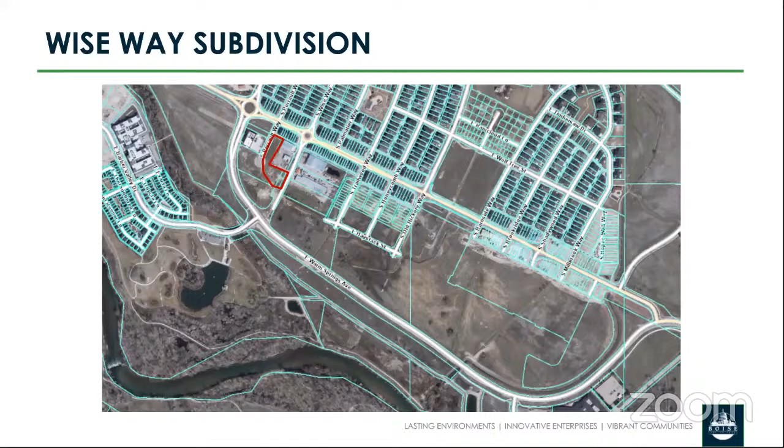Madam Chair, Commissioners, the next item on tonight's agenda is a request for a preliminary and final plat on 1.51 acres in an SP-01 zone. The residential subdivision is comprised of 4 buildable lots for future multifamily residential developments and live-work units. The proposed lots comply with the dimensional standards of the SP-01 zone and the Harris Ranch specific plan.

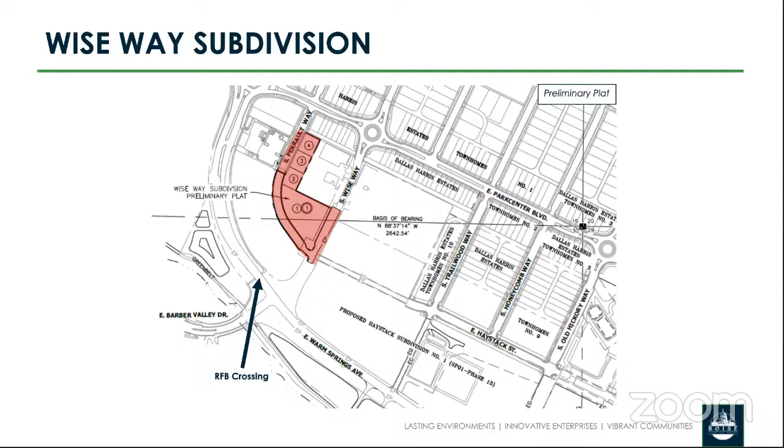The Harris Ranch specific plan designates the site as mixed-use commercial and medium high-density residential. The proposed street layout matches the circulation plan for the area. All of the buildings will be required to comply with the dimensional standards of the SP-01 zone and will require design review approval prior to receiving building permits.

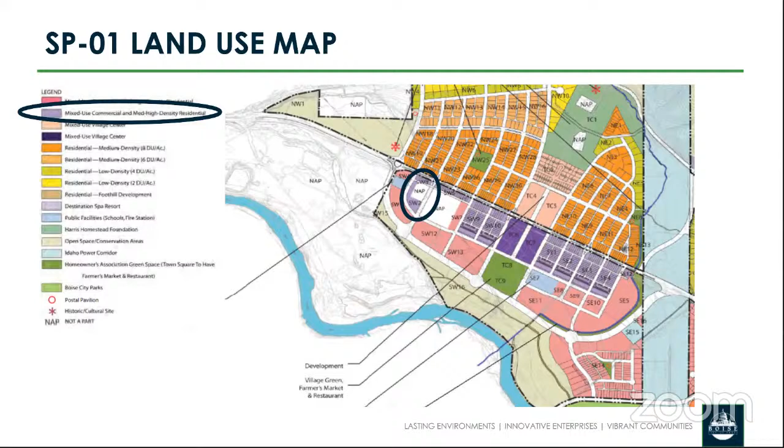The lot layout will comply with these block prototypes, which show several configuration possibilities, including attached townhomes, condominiums, and apartments near the sidewalk, creating a vibrant streetscape.

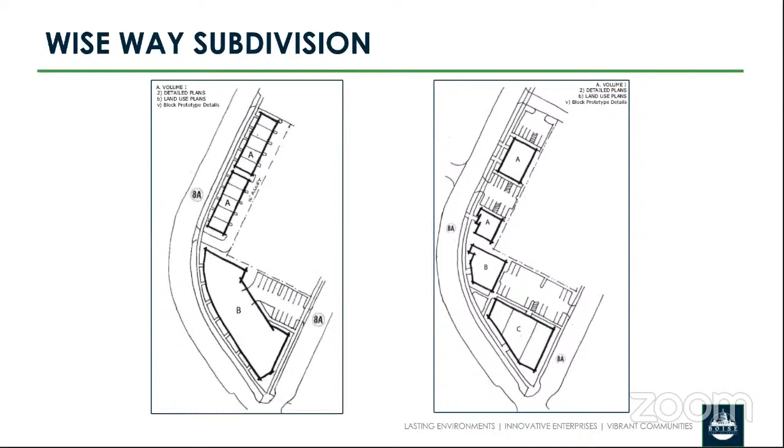PERRAULT Way is currently partially improved with 2 lanes, curb, gutter, and no sidewalk. The applicant proposes to extend PERRAULT Way to Wise Way and complete the road as a 39-foot wide street section with on-street parking, curb, gutter, planter strip, and detached concrete sidewalk abutting the site.

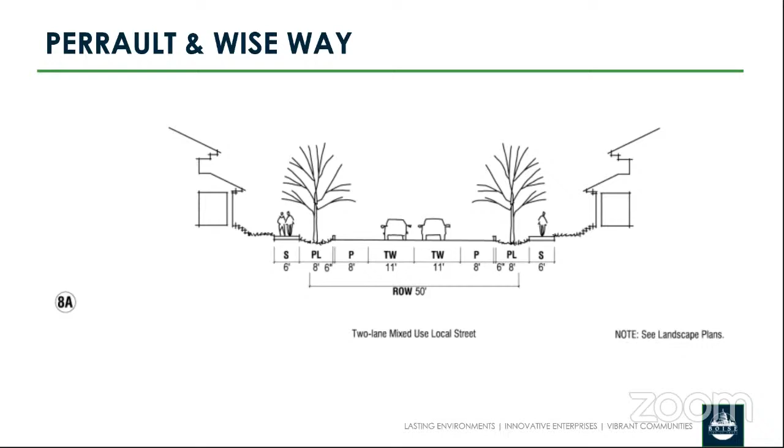Wise Way abutting the site will be improved as half of a 39-foot wide street section with a travel lane, on-street parking, curb, gutter, planter strip, and detached sidewalk. This is in compliance with the circulation plan of the Harris Ranch specific plan.

A future roundabout at Wise Way's intersection with Warm Springs Ave will be constructed once traffic counts warrant construction. Eventually, and if warranted, the specific plan has Warm Springs Ave planned as a 4-lane arterial roadway with 2-lane wide roundabouts at each intersection. However, it was determined that no improvements to Warm Springs Ave or its intersections would be needed at this time. As noted in the previous plat, the city is starting discussions with ACHD about the process in which to keep Warm Springs at 2 lanes.

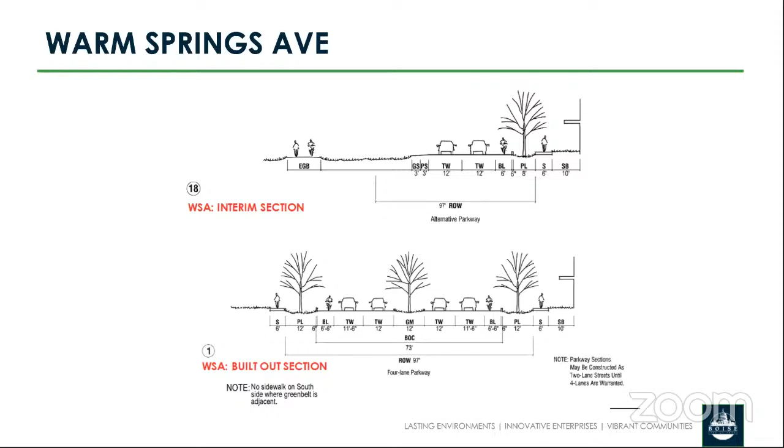Currently, the closest north-south pedestrian connection across Warm Springs is the rapid flashing beacon at the entrance to Marianne Williams Park, 341 feet to the south of the site. Comments from BB&A are included in late correspondence, and they are here tonight. In summary, BB&A supports the plat, but believes Wise Way should include bike lanes.

The Harris Ranch specific plan is an approved plan that provides both the neighborhood and developer assurances of what is planned and approved to be built in the area. The plan was recently amended in 2019, and while the neighbors' concerns are valid, they aren't specific to this subdivision application, but rather the entire Harris Ranch area.

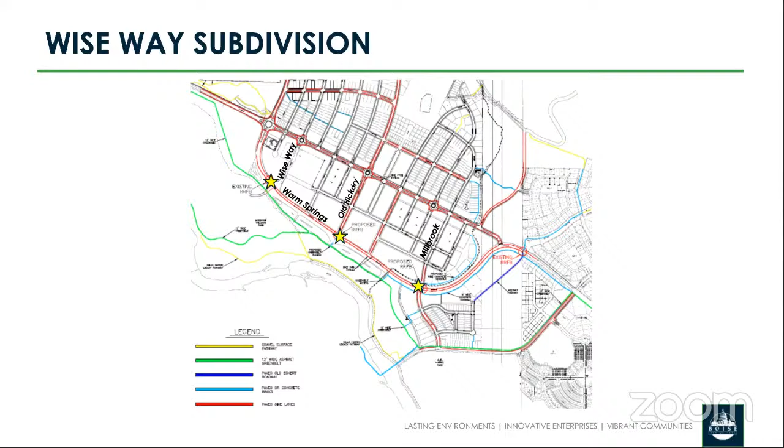These concerns would have been best addressed under the context of last year's specific plan amendment, and at this time, only a prelim and final plat is before the Planning and Zoning Commission in order to create the proposed lots and continue to extend right-of-way. Changes can still occur within the local roadways after build-out to accommodate pedestrians and bicycles. This should not delay the platting process.

As conditioned, the planning team recommends approval of the application with conditions. Thank you. Okay, thanks, Nicolette. We'll go ahead and hear from the applicant now.

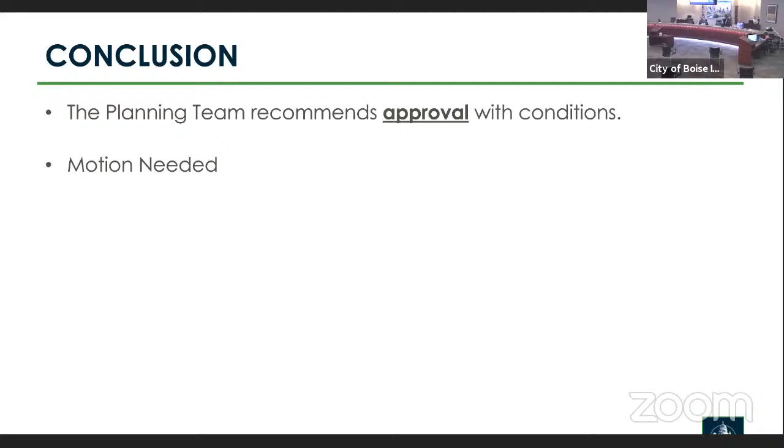Hi, everyone. Can you hear me? We can. Okay. Hethe Clark, 251 East Front Street with the law firm of Clark Wardle representing the applicant. I'll note that Doug Fowler and Dave Powell are also online, and if there are questions that either of them are better at answering, I'll defer to them.

I have prepared a slide deck, but I think in the interest of time, what I would like to just emphasize is a couple of things. First of all, as Nicolette mentioned, this does comply with SP01. It complies with all of the applicable block prototypes. And because it's squarely within the boundaries of SP01, this is a fairly straightforward matter.

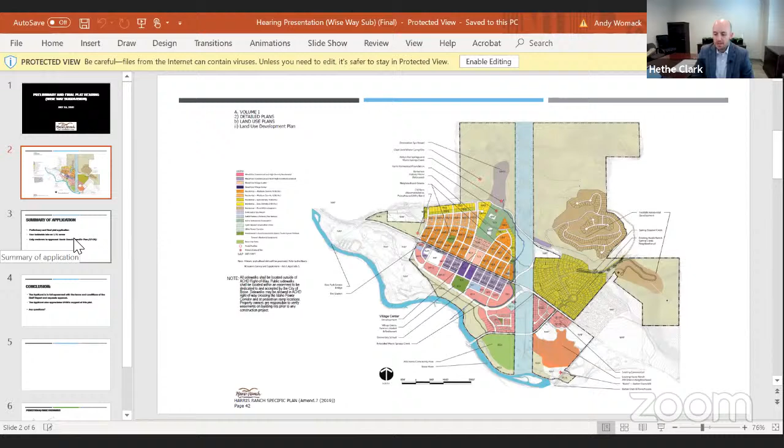We have appreciated the opportunity to work with and continue discussions with Barber Valley Neighborhood Association over the past several months, and we anticipate that continuing. But in the meantime, we are in agreement with the terms and conditions of the staff report and would ask for your approval. In the meantime, happy to answer any questions.

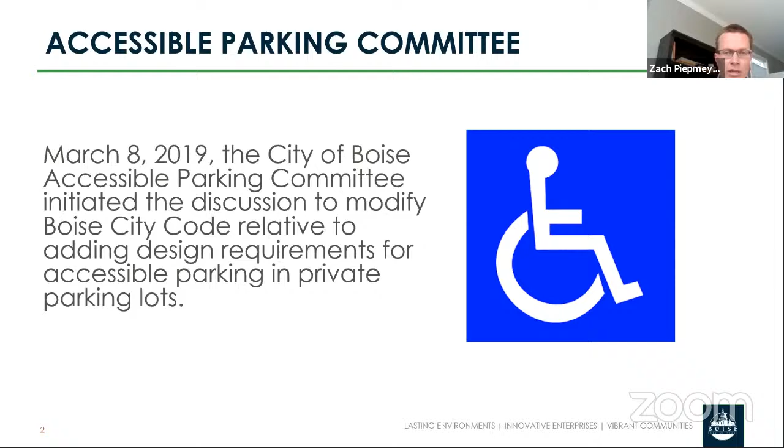Thank you, Mr. Chair and Commissioners. This item is in regards to proposed zoning code changes for accessible parking found under Boise City Code Chapter 11-07-03.5. Back in March of 2019, the city's Accessible Parking Committee initiated the discussion to modify city code relative to design requirements for accessible parking on private lots. From that discussion, the committee made three specific recommendations to the city of Boise, which are listed here.

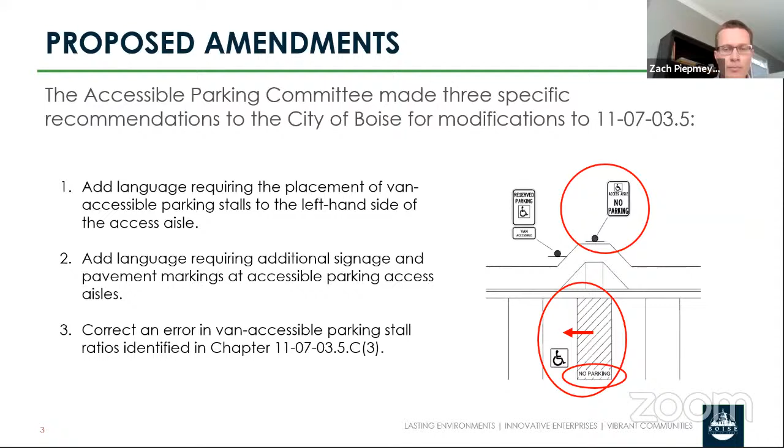The first is to add language requiring that the placement of van accessible parking stalls be to the left-hand side of the access aisle. Second is to place both signage at the head of the access aisle and pavement markings within the access aisle to indicate that it is in fact not a parking stall and therefore parking is prohibited. The third item is to correct an error in the ratio for van accessible to standard accessible parking stalls under subsection C3. Specifically, that third item references text where the current ratio is listed as 1 to 8 accessible spaces. However, the 2010 ADA standards for accessible design, and our code under 11-07-0.5.A, correctly identify the ratio as 1 to 6.

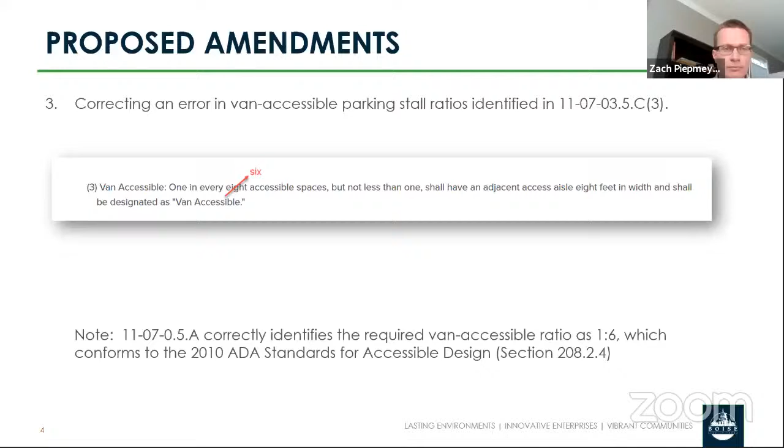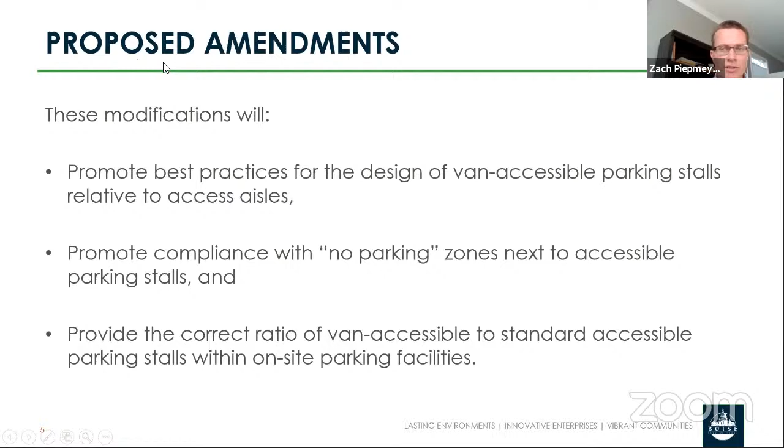These three modifications will promote best practices for the design of van accessible parking relative to the access aisle. It will promote compliance with no parking zones at accessible parking stalls, and it will provide for the correct ratio of van accessible to standard accessible stalls within on-site parking facilities. By providing the appropriate number of van accessible spaces, improving the design criteria for those stalls, and providing clear signage and pavement markings, the city of Boise will promote adequate facilities for those living with disabilities. These modifications will allow all individuals to have safe and efficient access to parking and buildings, making a significant improvement in comfort and safety for both residents and visitors.

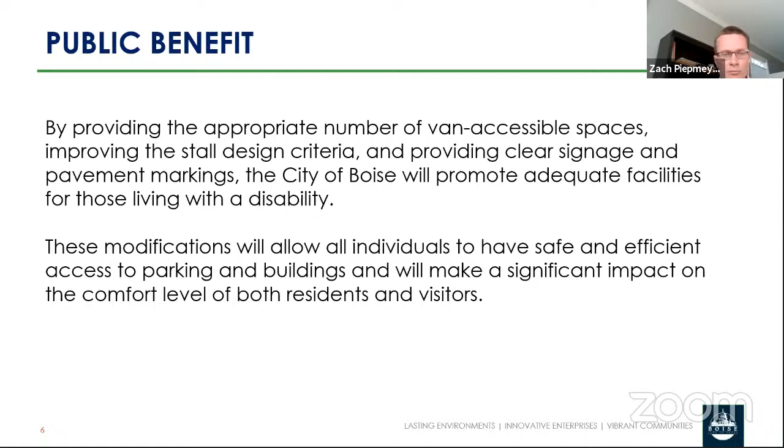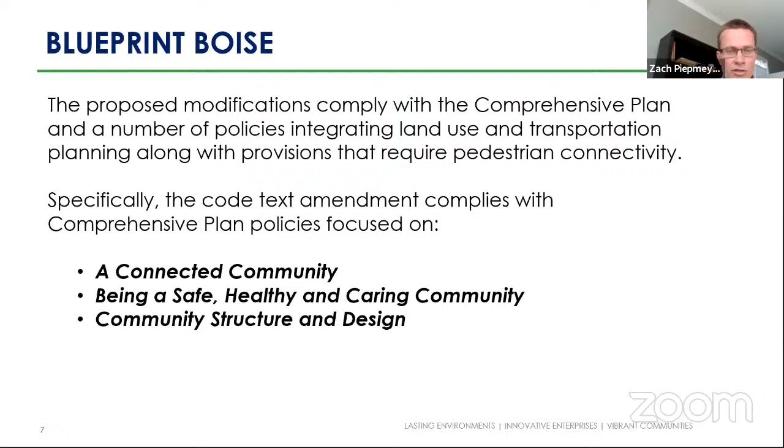In terms of Blueprint Boise, the proposed modifications comply with a number of policies integrating transportation and land use, specifically those reflected in a connected community, a safe and healthy and caring community, and community structure and design. With that, Planning and Development Services recommends that the Boise City Planning and Zoning Commission submit a recommendation of approval to the Boise City Council regarding the modifications to Chapter 11-07.03.5 noted within the staff report. I'll stand for any questions.

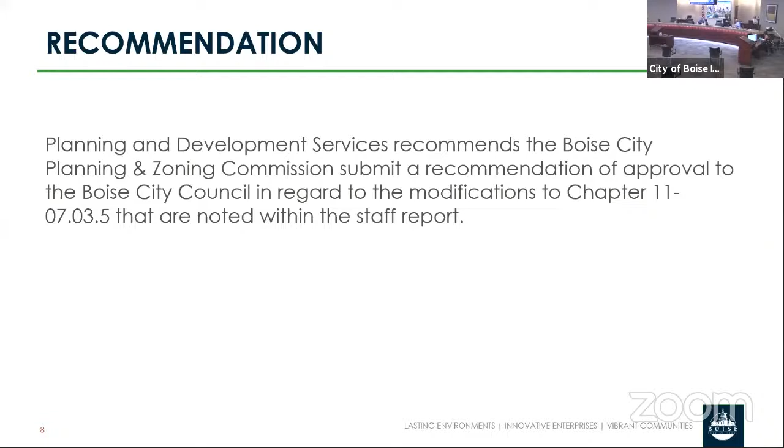Okay, thank you for that. Since the applicant is the city and it's a citywide code change, there's no neighborhood association, so I think we'll move right along into questions from the commission for the applicant.

Mr. Chair? Commissioner Bratnober. Yes, I have just one question. Am I correct in assuming that all current parking lots are grandfathered in under the old rules subsequent to the adoption of this?

Mr. Chair and Commissioners, I might defer to the current planning staff that's on hand, but I believe that is correct. For the record, Andrea Tuning, Comprehensive Planner for Planning and Development Services. That would be correct. Any existing parking lot would be grandfathered in, unless they were to ever change the use or redefine the parking lot. At that time, they would be required to come up to the current code, which would require the accessible parking stall design, signage, and pavement marking. Thank you very much.

Okay, any other questions for staff? Mr. Chair? Commissioner Blanchard? Can someone on city staff speak to the public contribution on this issue? What groups did we work with, or is this just a technical correction in your estimation? Mr. Chair and Commissioners, the recommendation actually originated from the city's citizen accessible parking committee, made up of seven members of the public who are familiar with this topic, and that is where the idea was generated. There's been no specific public outreach for this item or the proposed changes therein.

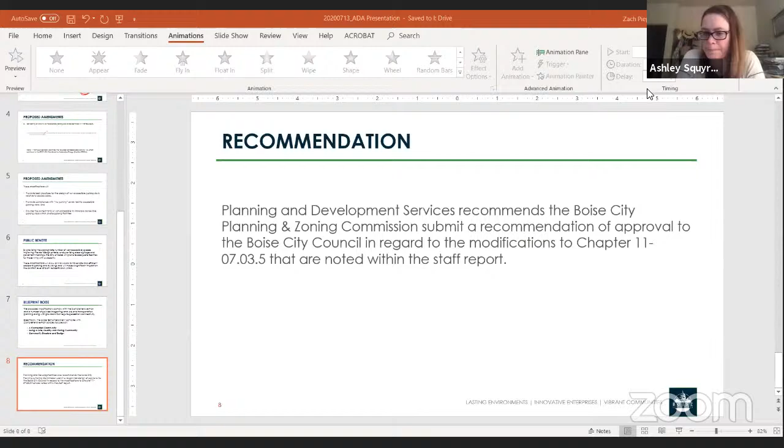Do I have a motion? Commissioner Bratnober? I move that we approve ZOA 19-4 based on the recommendations of the staff report. Second. A motion from Commissioner Bratnober, and I think a second from Commissioner Squires.

Any discussion? Okay, well, I'll just chime in real quick. I think that it's certainly a positive move to make this change to the code, make this recommendation to City Council. So we'll just kind of keep it short and sweet and leave it at that. Unless there's any other discussion, and if I'm missing someone, but I don't think I am, we'll go ahead and just call the vote.

Schaefer, Aye. Squires, Aye. Blanchard, Aye. Moore, Aye. Gillespie, Aye. Finfrock, Aye. Bratnober, Aye. All in favor, motion carries. Okay, thanks everybody.

And now we'll move on. I believe our next item is number 4. That is CFH 20-35 and SUB 20-17 at 3773 North Cartwright Road. This is a hillside grading permit and preliminary plat for, I believe, 4 buildable lots on 9.28 acres. And Mr. Moser is here this evening for staff.

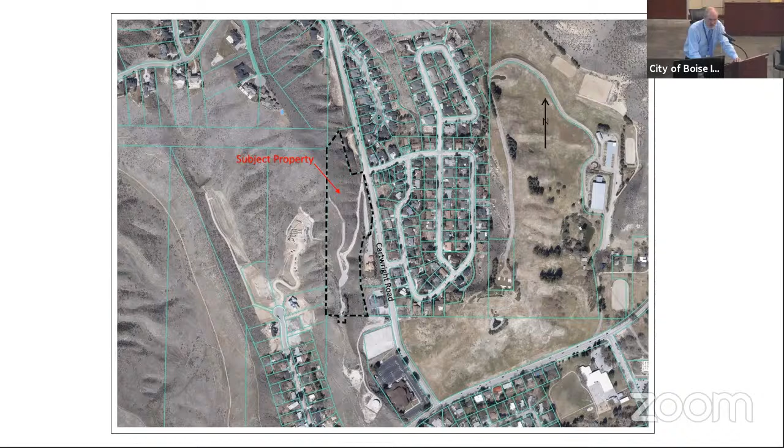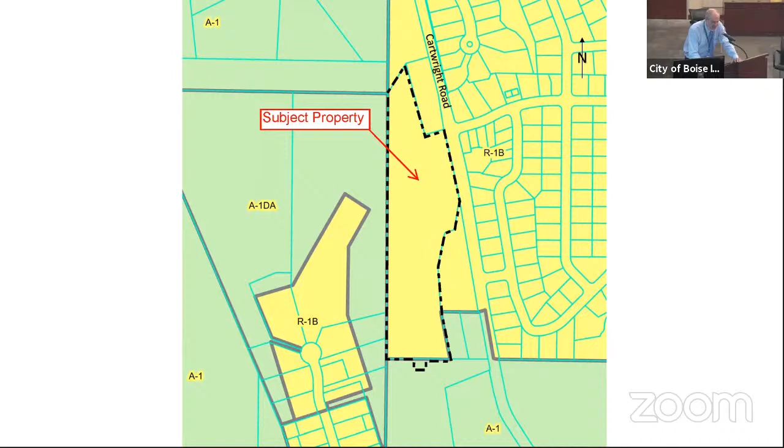This slide shows the current zoning of the site, which is R1B, single-family residential, with a small section of the property to the south zoned A1. Therefore, since the current zoning is already R1, single-family residential, no rezone is requested with this, and it's just a subdivision and a Category 3 hillside review application before the commission. I would note that the density of this project is actually very low. It's 4 lots on over 9 acres of land, so it's 0.4 units per acre at the proposed density.

The subject property, well, before I start, just a reference, the north arrow here is actually to the side of the page. It's just easier to configure the odd configuration of this lot on the slide. So the north arrow is not to the north or to the top of the page.

The subject property was initially platted as Lot 3 of the Lononi Hills subdivision with the intent to be developed as a single-family house. The grading of Lot 3, which included the service drive and the building pad, was completed back in 2002. The grading created a relatively flat area on the top of the ridge. The applicant intends to grade this already existing flat area into 4 building pads, each on its own lot, and the lots will range in size from 1.2 to over 4 acres in size.

This is the proposed lot layout for the subdivision on the preliminary plat. The grading plan shows the 4 buildable pads and the service drive, which is existing. Since the grading is generally restricted to the previous graded area, the grading proposed is limited to the essential grading only, and the cut and fill is balanced throughout the site with the proposed project. The project grading was reviewed by the public works engineer, who stated that if all the conditions are met, the project is in compliance with the Hillside Development Code.

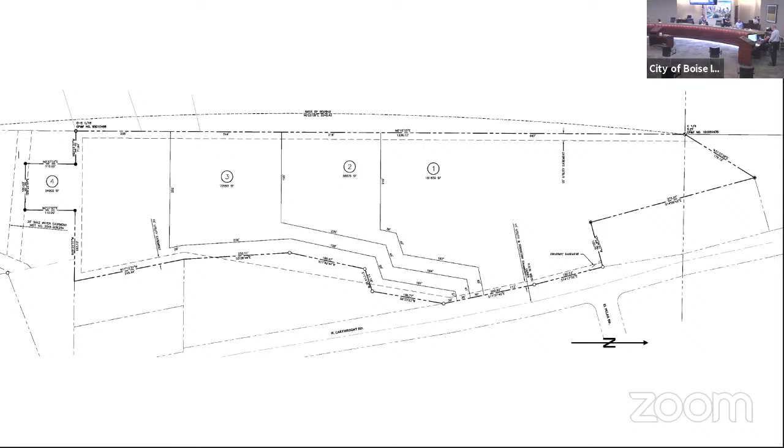David, can you put the grading plan back up on the screen, please? And Ms. Suggs, you can please start with your name and address for the record. I will do that, thank you very much. Good evening, commissioners, staff, and of course all the virtual guests. I'm Jane Suggs with Gem State Planning, 9840 West Overland Road, Suite 120 in Boise.

Dave gave you a pretty quick overview of the project, but I can add a few things. One is the most important one: I'm going to start off by letting you know we agree with and accept all the conditions of approval for both the subdivision and the hillside applications.

As David mentioned, the property was previously approved as a subdivision called Leone Hills. It was approved and platted back in about 1999, 2000. Around 2005 is when some of these improvements were made, the road was put in and some grading. Dave, I don't know if you have the original existing conditions drawing, but it shows where those pads are, kind of where the grading has already occurred or where there are gently sloping areas.

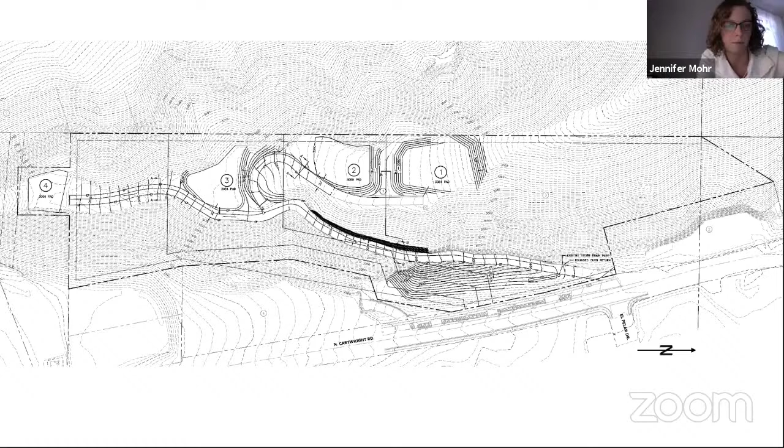Mr. Chairman, Commissioner Gillespie. So I just want to make sure I understand, and I'm looking at the same slide everyone's looking at. So lots 1, 2, 3, and 4, you can clearly see the building pads, the flattish area. So is it my understanding that all 4 of those areas had been previously graded or gently contoured?

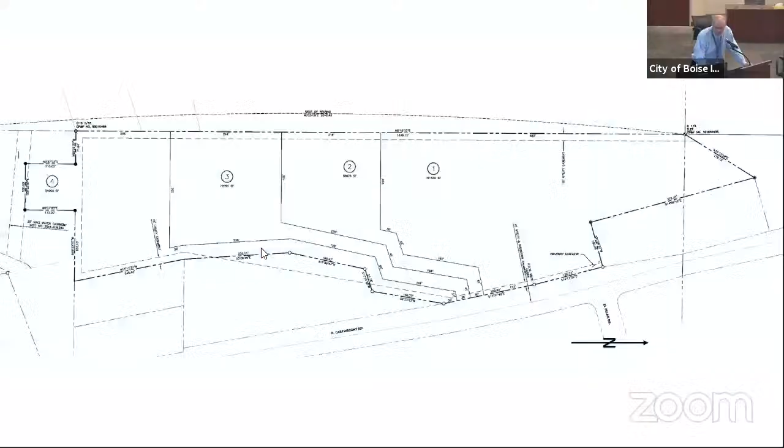Mr. Chair, members of the commission, if you can bring up some of the old aerial photographs, lot 1, 2, and 3 was definitely previously graded for the house. No, it took, we can stay on that topo page. It was better. So you can actually kind of see the underlying slopes. Yeah, so it's real gentle.

So the heavy grading was done 15 years ago, around 2002, 2005. Now, pad 4, is that a house pad on the far south side where it says 4? That is correct. That's what they're proposing. And that shows also that it's already been graded, it looks like to me. In fact, that whole road going out to 4 looks like it's been graded to me. Because the topo's just changed dramatically.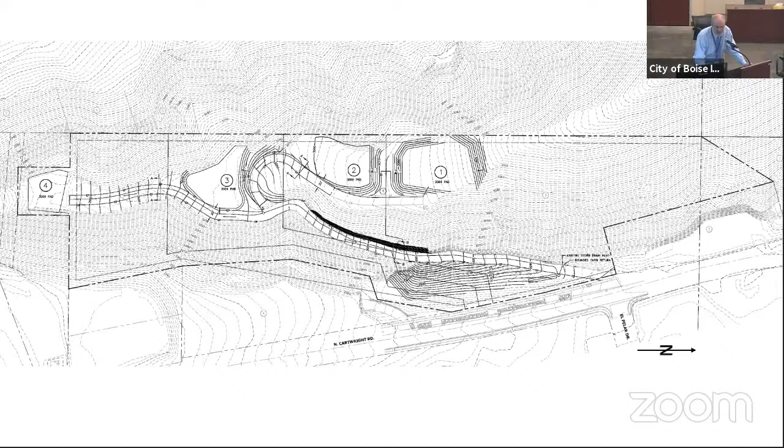That is correct. Mr. Chair, members of the commission, the area out to number 4, there is a road that currently goes out there. So clearly it was graded, and the road was constructed out to that 4 building pad area, which is on top of or close to the top of the ridge and was naturally relatively flat to begin with. Yeah, it was always flatter, but it's been widened. Yes. Okay, thank you. I'll let others take a crack.

Any other questions from the commission for staff or the applicant?

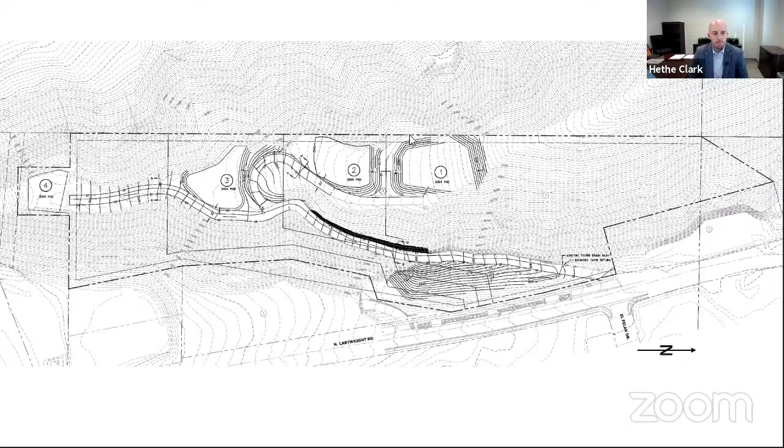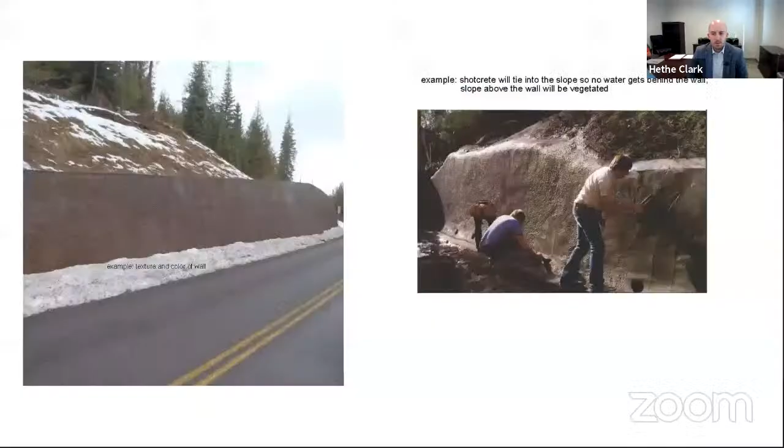I will, thank you. David has a brief presentation I think that he could maybe load up for me. Again, Hethe Clark, 251 East Front Street. In this case, I'm representing ZWJ Properties, LLC, and its principal, Zeke Johnson. Zeke's here with me. When we can get this up, I'd like to refer to that picture as we go. So I'd ask for your patience. That's the one.

Thank you. So as I start out, I do want to be clear that we are not opposed to development in general, including in this area. My client's development, the Wynn Hollow subdivision, was approved a few years ago immediately to the west of the proposed project. As you're looking at the grading map that we've all been referring to today, it's immediately above this picture. You can see that there is a steep grade from this project down to my client's development, and it's that proximity to those steep slope areas that causes us to want to be on the record about a few issues.

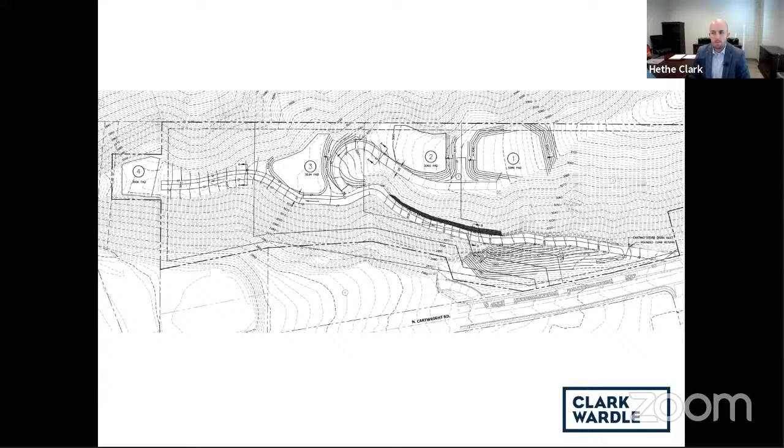Dave, can I advance slides, or do you guys need to advance them? Thank you. So this picture helps to illustrate our concern. This is the view from the southwest facing the proposed subdivision. When Wynn Hollow was developed, which was after this grading that was done on top of the adjacent hillside, like in other foothills projects, we did slope stability studies at that point. As a result of that, catchment walls were required to address the possibility of unstable slopes. Those catchment walls were installed in the areas that I've indicated here with yellow arrows. In total, there's about $500,000 of catchment wall that's been installed, and they are not insignificant. Those walls are design rated to exceed the loads that a highway barrier can handle.

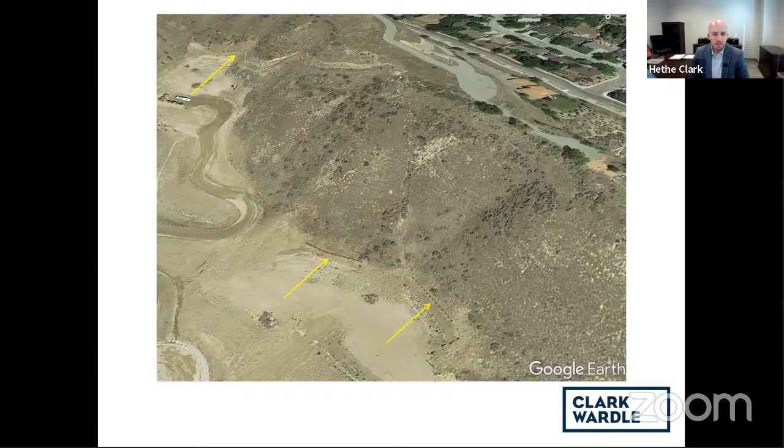Next slide. We have two concerns that we hope can be addressed through this process. The first is with regard to the proximity of the slopes. We're concerned that the defensible space required under the Wildland Urban Interface Code will be along those steep slopes. That means if those areas have to be maintained, there could be additional erosion. So to avoid that, we're suggesting that the defensible space all be above the edge of slope.

Second concern is with regard to water. We understand the plans with regard to stormwater, but we're also concerned about irrigation, overwatering, and keeping all of that away from the edges of the property. That's why you can see in this letter, which we requested an analysis from MTI, they made a recommendation that there be a no-water zone established at the top of slopes to prohibit potentially destabilizing effects of water irrigation, runoff, and subsurface discharge. Next slide.

Practically, we understand that it could be difficult to enforce that. You can put it in the CC&Rs, but then you're relying on the HOA to prevent a problem that could be pretty horrific if it plays out. So our suggestion would be to move the driveways around, and that would essentially force a reduction in the amount of landscape that could be overwatered and lead to erosion above us. So again, excuse me, we are not opposed to the development, but we are concerned with two things: the use of steep slopes for defensible space, and we're very concerned with the possibility of overwatering, which we believe could be a significant potential hazard to our property. With that, I'd leave and be happy to answer any questions.

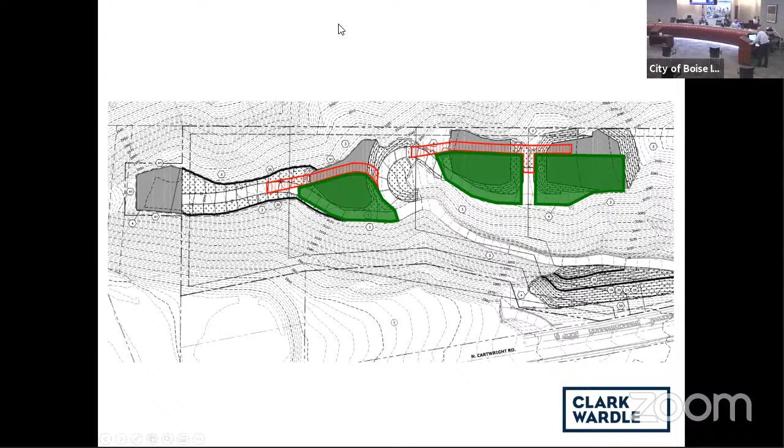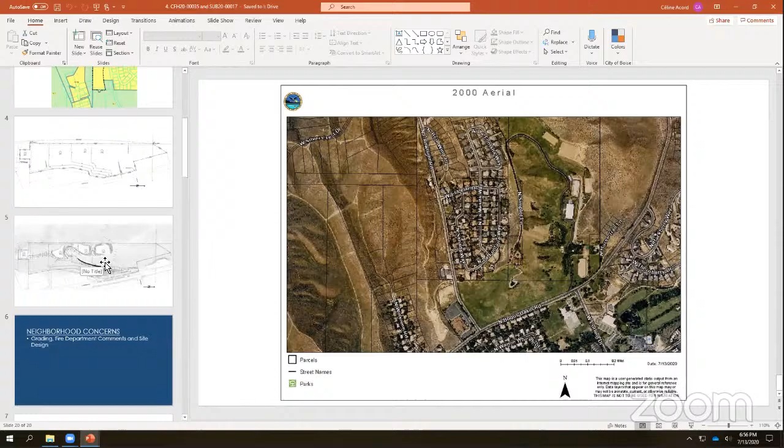Yes, my name is Deborah Steyer. I'm at 4163 North La Fontana Way, up in the El Pilar Upper Neighborhood Association. As we do not have a homeowners association at this time in our neighborhood, I felt it was prudent that we had somebody speak for our neighbors.

Our concern is not in the development in itself. We are not opposed to having the development there. Ours is line of sight. Earlier, they addressed that and stated that our view is only to the south, which is inaccurate. Our view in the upper neighborhood is also to the west. And our concern is that these 4 homes would degrade the value of our homes when that view is blocked.

We would suggest that there be stated somewhere that the tree height in these neighborhoods be restricted to no greater than 20 feet tall, so that we can maintain our property value in the upper El Pilar neighborhood. Thank you very much.

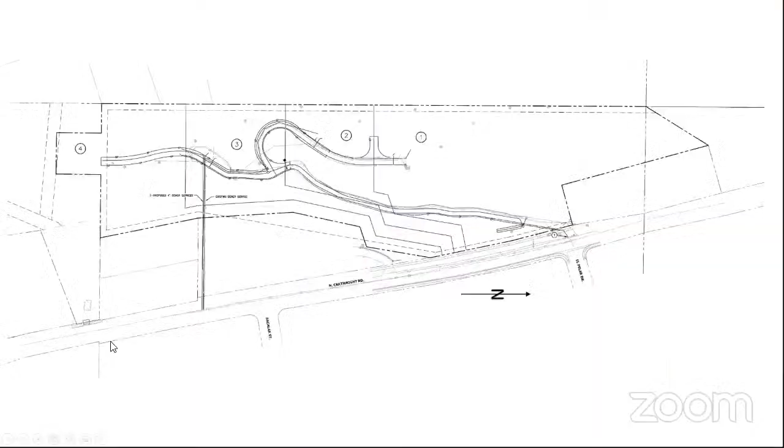This is shotcrete that's on top of a soil nail wall. And that's a little different from maybe some of the shotcrete walls you've seen around town that look like they're just sprayed onto the soil itself. So rest assured that our geotechnical engineer has taken a look at this and has specified a soil nail wall that's then covered with textured and dyed shotcrete.

I'm going to have to defer to Dave about work hours. I believe they're 7 a.m. to probably 7 p.m. or something like that. We certainly don't, especially in these hot summer days, don't wait until 8 o'clock, and we don't stop at 5 when we're under construction. However, the engineer has spent a lot of time trying to balance the cut and fill on the property. So the larger trucks that would be moving stuff wouldn't be coming up and down the driveway. So we're trying really hard to keep the soil that's up on the top of the hill, on top of the hill.

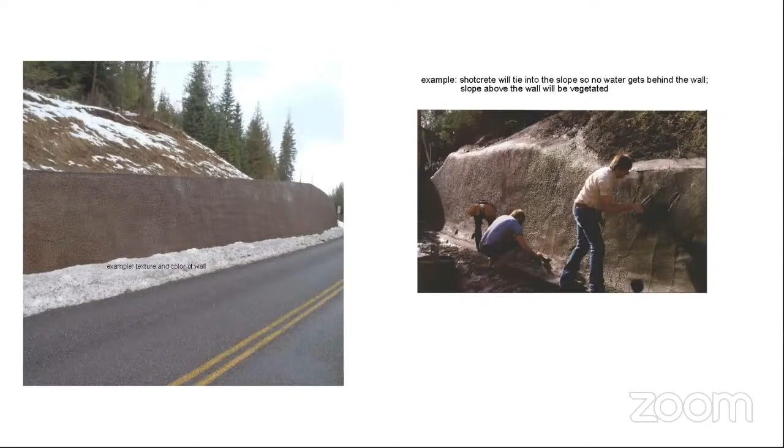I'm not going to talk a whole lot about Mr. Clark's and Mr. Johnson's request to redesign the project. I do have the two experts on tap, sort of. So if they would like to maybe weigh in on this idea. Dave, if you could put our grading plan back up, just so that they would have something to talk about. It helps to see, and yeah, even that one, either one that shows those lots and how they were, as Mr. Gillespie said, already sort of. I'll let Dave Powell and Adrian chat with you about some of these issues with catchments and water.

So this is Dave Powell. Can people hear me? We can, yes. Okay, Dave Powell, 2447 South Vista Avenue, Boise, Idaho.

I'm the project engineer for this particular project. This project has on the upper portion, the upper road that follows lot 1 and lot 2, that's an existing roadway. It's in excellent condition. All of the utilities to lots 1 and 2 are already installed along that alignment. So to think of wasting that roadway, going over to the west side, totally regrading that to accept a new roadway just does not make sense for the project.

And I can appreciate the concerns of Mr. Johnson and his home site down below, but I think we have enough checks and balances in this project with our geotechnical evaluations, our grading evaluations, and city public works evaluations and constraints that are going to be put on this project, so that we can provide for proper grading and drainage to protect the slopes below to the west. A visual inspection of this area, either through Google Earth or aerial photos, shows that at least to date there's been no sloughing of these soils, no loss of vegetation, no erosion of these slopes that would put that property down at the bottom of the slope at jeopardy.

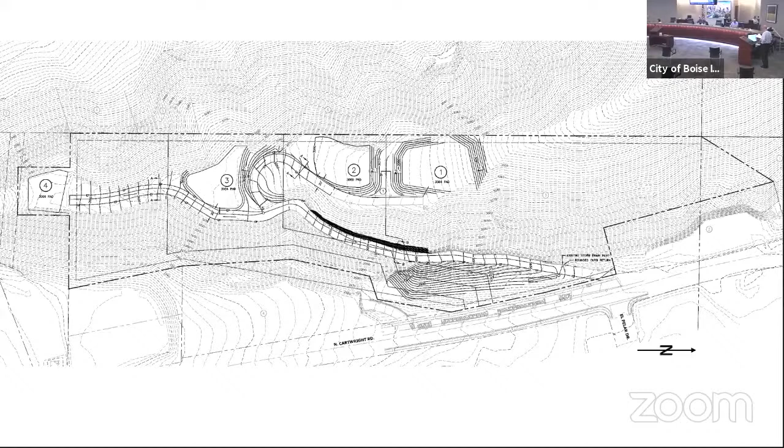Okay, with that, we're going to go ahead and send these items back to the commission. And what is the commission's pleasure? Mr. Chairman. Commissioner Gillespie. I move that we approve CFH 20-35 and recommend approval to the City Council of SUB 20-17 with all the terms and conditions in the staff report. Second. Okay, thank you. I have a motion for approval from Commissioner Gillespie and a second from Commissioner Squires.

Mr. Chairman. Commissioner Gillespie. So just a couple of things that are really forefront of my mind. One, these pads are, for all intents and purposes, already there, and they've been there for quite some time. And so unlike a lot of foothills development, we actually know that at least the grading that's been done hasn't caused, as the engineer said, sloughing or erosion, or we haven't had a big issue.

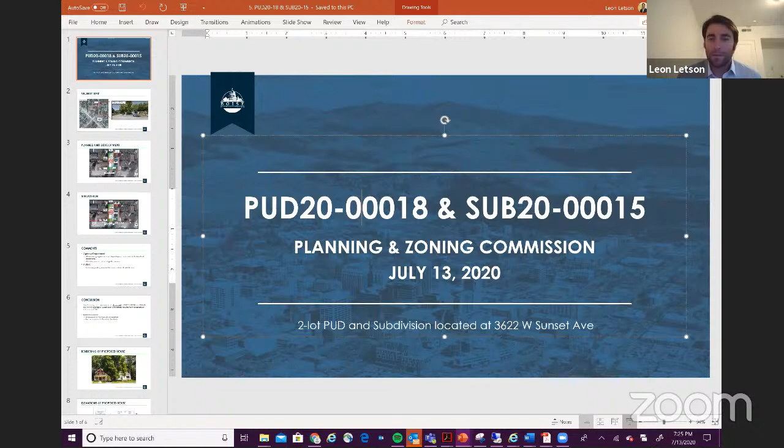The items before you are a 2-lot PUD and subdivision located at 3622 West Sunset Avenue in an R1C zone. The subject property is a 0.3 acre parcel located on the north side of Sunset Avenue between 36th Street and Woody Drive. Surrounding uses include single-family homes on lots ranging from 1/8 to 1/3 of an acre in size. Howard Taft Elementary is approximately 500 feet to the southwest, and the intersection of Veterans Memorial Parkway and State Street is less than 1/4 of a mile to the south.

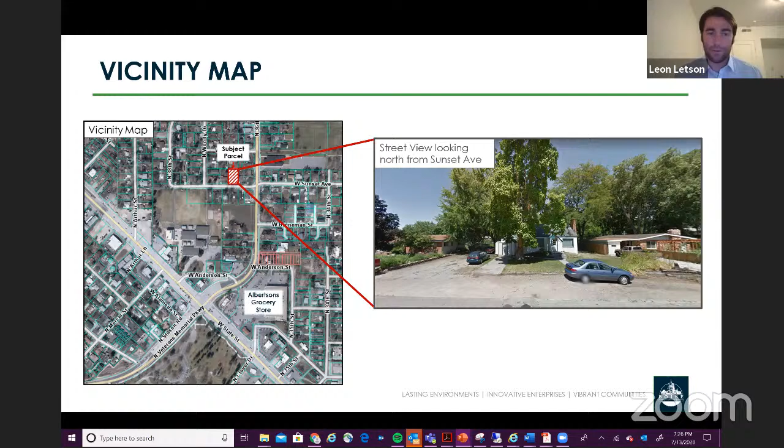The PUD consists of 2 lots approximately 6,000 and 7,300 square feet each. The only dimensional standard the applicant is utilizing the PUD for involves a reduction to the minimum lot width of 50 feet typically required in the R1C zone. The lot pictured here on the west side of the development will be approximately 43 feet wide. Both homes will be served by individual driveways, and parking will be located behind the homes. Other than the removal of 1 silver maple at the center of the new lot on the west, all existing trees on site will be retained, and additional trees will be planted throughout the development as well.

As previously mentioned, the project includes a 2-lot subdivision. Included in this request is a waiver to the requirements to install curb, gutter, and sidewalks. Although the planning team is supportive of the request to waive curb and gutter, we believe sidewalks should be installed.

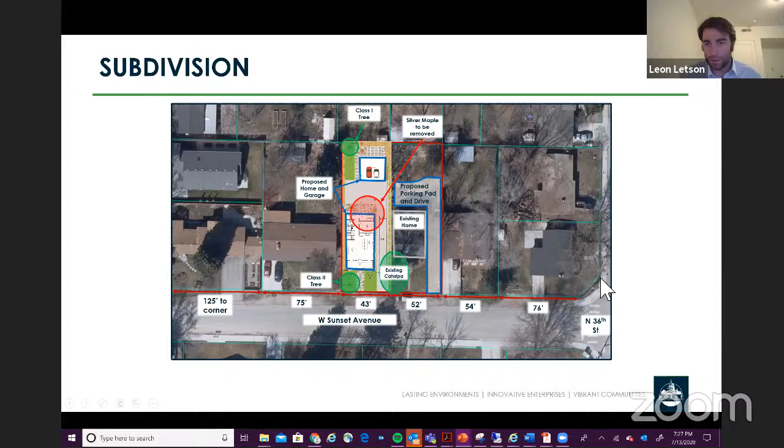Pictured here is an overview of the neighborhood. Currently, sidewalks exist on the south side of Sunset Avenue. So this area here, we have attached sidewalks, and approximately 130 feet to the east on the north side of Sunset Avenue near the intersection with 36th Street.

All reviewing agencies and departments approve the project with standard conditions. ACHD does support waiving curb and gutter for drainage and other typical reasons that they waive curb and gutter on projects like this. It should be noted that included in late correspondence, there was a letter from the neighbor to the east who encouraged waiving sidewalk as well, and I hope the commission had a chance to read that letter, but largely some of their major concerns were signs typically used by ACHD to show the end of a sidewalk.

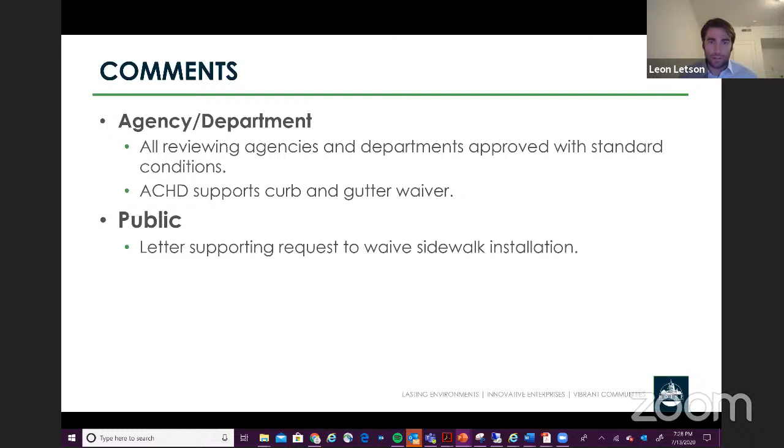If you've driven around our city, you've probably seen these. They're kind of large red and white signs indicating that no sidewalk continues beyond this point. So from a visual standpoint, they were concerned. And if they're on the call tonight, they can give you additional reasons as well, but they were also stated in that letter. So in conclusion, the planning team recommends approval of the PUD and waiver of the subdivision ordinance requirement for curb and gutter, as well as the 2-lot subdivision.

The motions needed are a final decision on the planned unit development and a recommendation to council on the subdivision. And that concludes my presentation. Thank you.

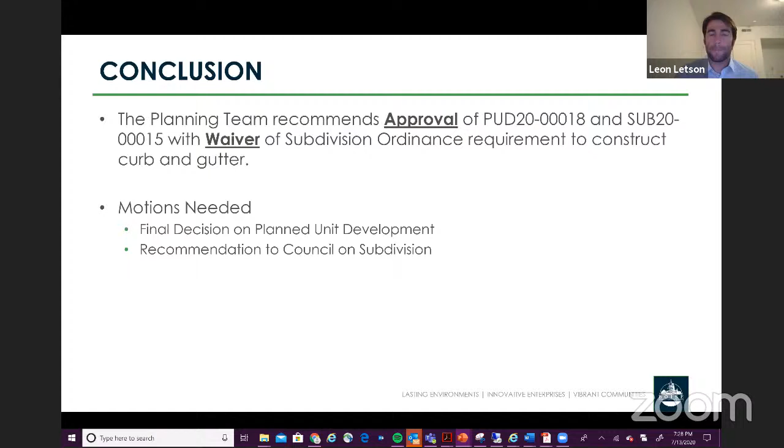Hi, my name is Matt Smith, 3622 West Sunset. I'm here with my wife, Sam Smith. Can everybody hear us? We can, yeah. Oh, okay, great. Yeah, so thank you guys for sticking around so late and reviewing this for us.

I just wanted to mention a couple things. We do have a waiver, and we decided to do the waiver. It took a little while before we came to this conclusion, but I was talking to Ethan and I thought it was actually fine with the sidewalk and curb and gutter, if not all of it, until I started talking to ACHD and I realized Ethan had asked me if they were planning on having in their 5-year plan, and so I went ahead and asked that, and then ACHD mentioned, I think it was Stacy Yarrington from ACHD, that it's not in the 5 or 10-year plan for ACHD. In fact, it's not in the plan at all to put a sidewalk.

And I didn't know this, but apparently the city wouldn't ask for the sidewalk unless there was a subdivision going in. This is Ethan mentioning that to me. And the 2 houses to the east of us, they're developed, and the lots are developed, and they were just purchased recently by 2 young couples.

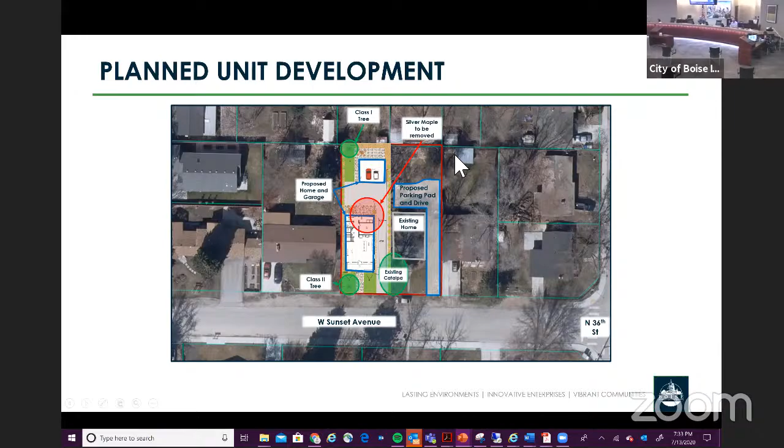Okay, we'll see if we have someone from the Neighborhood Association online - the Veterans Park Neighborhood Association. If they're online, could you please raise your hand? Okay, no takers. So with that, we will go ahead.

There's really nothing to rebut by the applicant. So with that, we'll just go ahead and throw it back to the commission for any questions to either staff or the applicant.

Mr. Chairman, Commissioner Squires - I have a question for staff. Leon, talk to me about, I'm having the same issue that the applicant's having with the sidewalk. I'm always a huge advocate for pedestrian connectivity, but this doesn't make a whole lot of sense to me right now, especially because it's not in ACHD's 5 or 10-year work plan.

Is there other parcels getting ready to redevelop that we may need to know about, or other opportunities to connect that sidewalk sooner than later that should be considered as part of this? Chair, Commissioner Squires, not to my knowledge - there's no redevelopment in the area that would really connect this property to existing sidewalks. It's more of a principle that we try to get sidewalks wherever we can, certainly at the discretion of the commission to decide if that's appropriate here. I think there have been good arguments made on both sides, but no adjacent parcels redeveloping that staff is aware of.

So, thank you. Leon, or Mr. Chairman? Commissioner Gillespie? Leon, are there any physical aspects of this development that would make putting in a sidewalk any more difficult than it is anywhere else in the city under similar development circumstances?